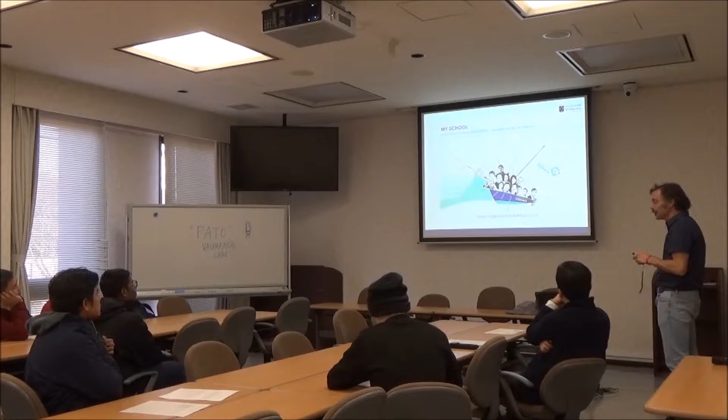I'm from the School of Ocean Engineering at Universidad de Valparaíso - it's a very strange name, but that's the name of the city. I'm basically a civil engineer, but I did some environmental engineering. My major in the PhD was environmental fluid mechanics, and I work with this professor, Professor Patricio, as Professor Lee told you just before. So I'm going to talk about that from that perspective, civil engineering and hydraulics and all that stuff.

Why am I here? Basically because I'm very interested in what happens in Japan. So I took a leave of absence from the university from December till the beginning of March and came to the country of Yoshimi Goda and all these people. We have to deal with coastal engineering problems all the time, and Yoshimi Goda is kind of like, wow. So why not come to Japan and visit you?

Also, I'm really interested in what Dr. Lee does here in terms of tide-tsunami interaction. That was one of the research topics I covered in the last couple of years. Now I'm shifting towards other things - in coastal engineering you do lots of things, it's not so specific.

I'm working with Professor Keiji Satake at the University of Tokyo trying to learn something about inversion of earthquake sources with tsunami data. It's just an excuse to come here and learn something about how research happens here in Japan.

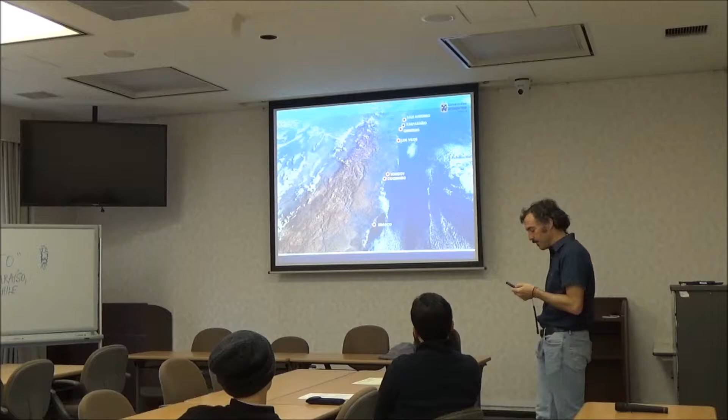And these are the kind of activities we have. We are a mining country - this is the export of iron. We also have salmon - almost all of our salmon is exported to Japan.

Seriously, this is in the south, where the Andes sinks into the ocean. That looks like Mount Fuji. We have lots of our mountain Fuji's there, and this is not a big one - they're much larger.

This is my hometown, one of the second largest ports in Chile. My office is somewhere here, behind this. So imagine that you're studying tsunamis and earthquakes and all that stuff, and you're literally on top of the coast. So it's very interesting.

If we talk about coastal engineering, to give a general point of view, these are some of the variables that we need to take into account when we make a design - for example a port, a coastal road, or an artificial beach. You need to know variables about the ocean, like sea level rise or not, waves, tsunamis, and all that stuff. In this talk, I'm going to talk a little bit about waves and its relation with storm surges, and about tsunamis. I'm going to skip the rest.

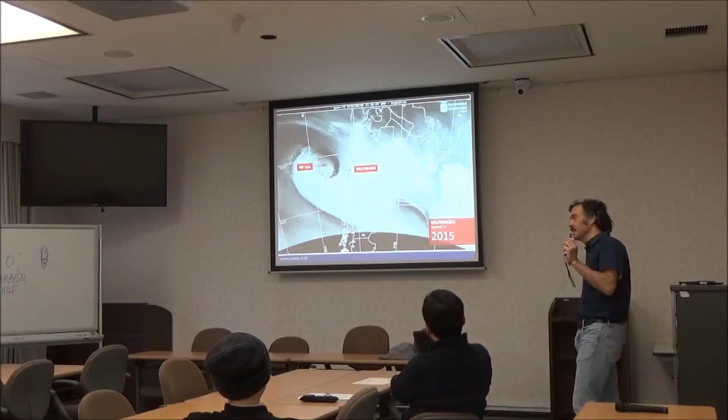I'm going to talk about a big storm. For us it's not big if you compare it with storm surges in, say, the Mexican Gulf. But I'm going to talk about one particular storm that we've been studying because it caused lots of damage in central Chile.

This is the type of image you may have on a coast. There's a hotel, and this hotel was attacked by the waves, and all the facilities on the first, second and third stories were mostly destroyed. And this is just one case.

But this is a very simple thing to explain to kids, what waves are. You need a source of energy, the sun, which generates winds. The winds transfer their energy into locally generated waves called seas, and then they get older. At the beginning they are very difficult to understand, like kids, and then they become more ordered, and finally they literally die and transfer their energy to all the other processes, like sediment transport in the coast.

A very simple thing, but this becomes a little bit more complicated if we start digging into engineering. So waves in the context of storms can be separated into time and space, and there are different scales.

Swell generation and sea generation offshore can take days up to weeks to generate. But then you have coastal waters, the waves approaching the coast, which tend to be affected by refraction, shoaling, and all that stuff. Then you have nearshore waves where diffraction and reflection become important.

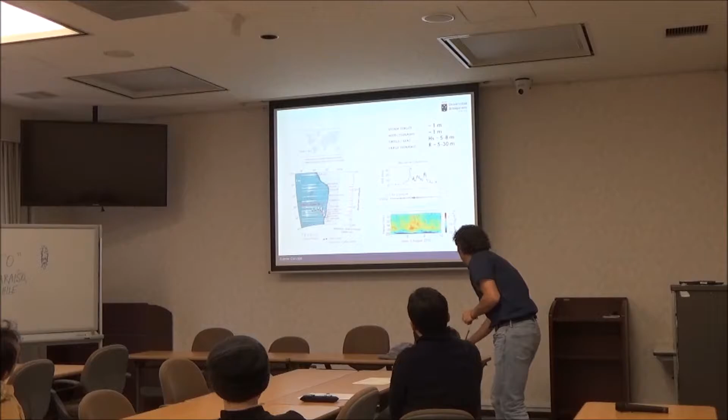You can see here the high frequency long wave being generated by this storm at different tidal gauges in South America. For example, in Callao, which is something like 3,000 kilometers away from the source, this kind of perturbation was detected. So even though it's a locally generated phenomena, it generates waves, tsunamis, and storm surges that radiate from the source and affect other places.

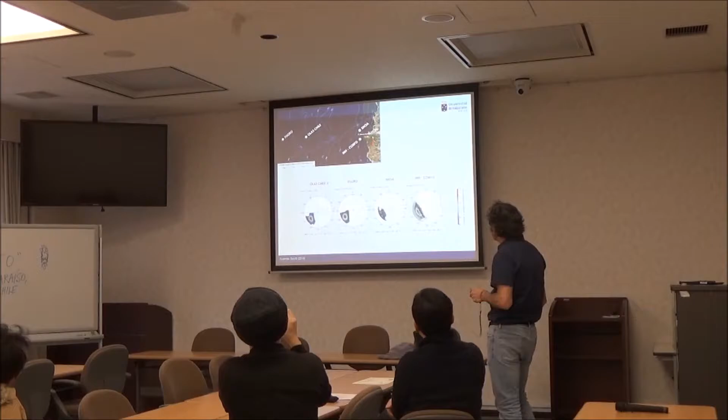Going a little more local, this is Valparaíso, the place where I live. What we can do is get information from wave forecasts, and also get information from buoys, in order to take that information as close as we can to analyze this particular case. Then we can use different grids to take this information into more coastal areas.

We can make analysis within the bay. These are many places within the bay - that's my office there. This is basically the wave height, the period, and the tide level at different times. So we can estimate what's the overtopping, for example, in places like this.

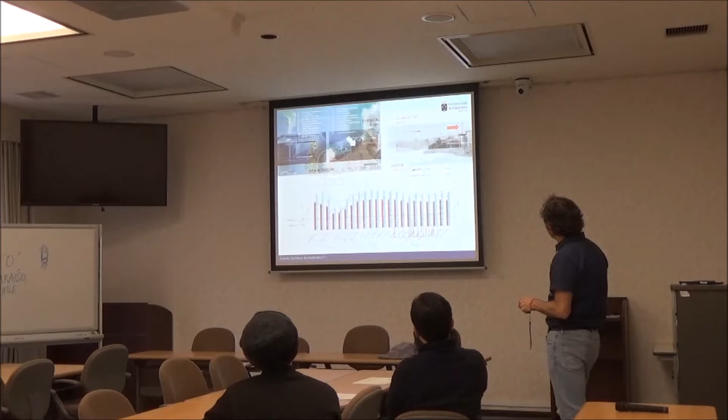This is a physical model that we carried out - the Chilean hydraulic lab carried it out, and we did the corresponding analysis with some sort of OpenFOAM type of model.

So from this type of information, let me show you a video first. It will take some time.

So here's the submarine beach, and then you have the structure here. What we did was build an artificial pond in order to capture all the water and estimate what's the volume. Because with that volume, you can design all the drains of the coastal road, to avoid flooding.

You can calculate, for example, instantaneous flooding or the accumulated volume over time. So in this particular case, we are calculating the flow crossing this area, and with that flow, we can also calculate the velocities and see how safe it is, for example, for a person to be here, depending on the water depth and the speed.

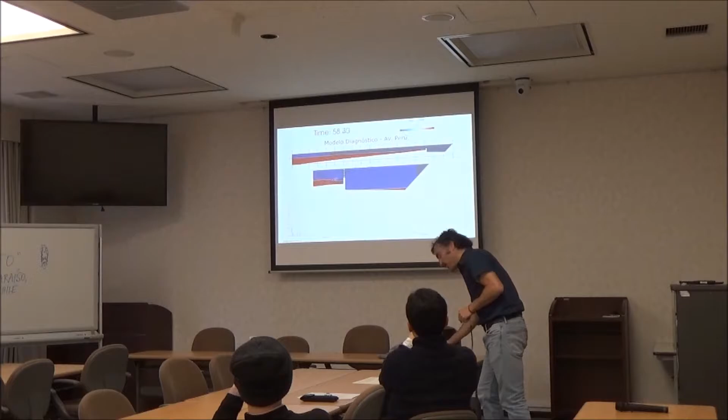Did you use OpenFOAM? It's OlaFOAM - an adaptation of OpenFOAM with some boundary conditions of waves. It was generated by Pablo Higuera from IH Cantabria, and he's now working with Philip Liu in Singapore and in the US. So they adapted the OpenFOAM, and now it's called Ola, which in Spanish means wave. OlaFOAM, yeah.

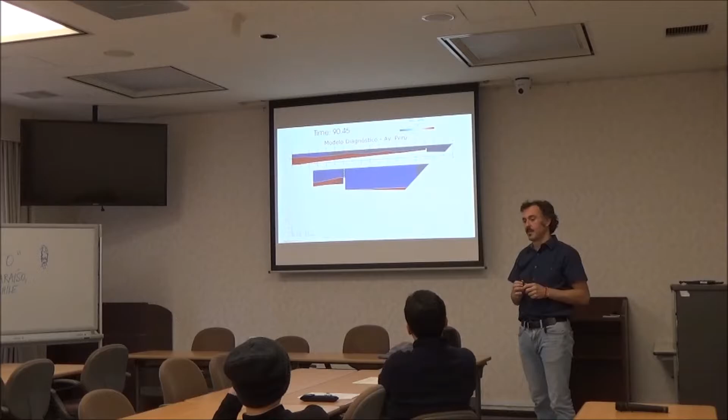So as I said, you can calculate the instantaneous flows at different times, and then the accumulated volume to calculate the drain design. And this one is for safety.

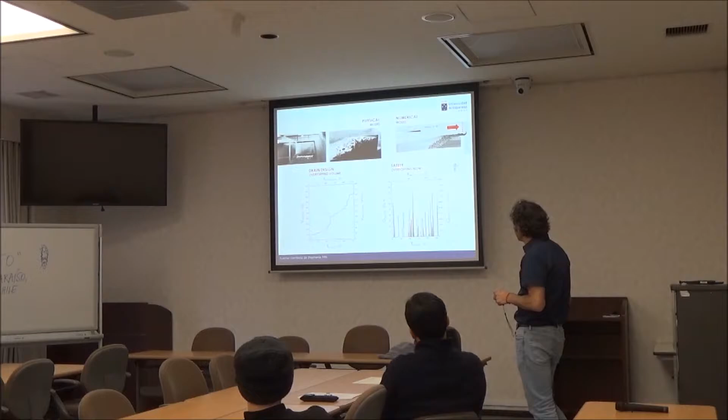This is something very preliminary that I haven't been able to review because it's an undergrad doing a very simple calculation. But you can actually calculate with a very simple body force diagram what's the combination between water depth and speed that would make someone fall.

I brought this because I know Professor Taro Arikawa has done something with tsunamis here, but I haven't found any paper in the literature calculating the flow and the body forces attacking a person or a car - kind of an empirical approach to understand what flow speed would move someone. There are some studies, or even physical modeling studies, going on at Kyoto University. Okay, so I have to go there - I know Professor Arikawa has done something, but I haven't found anything published.

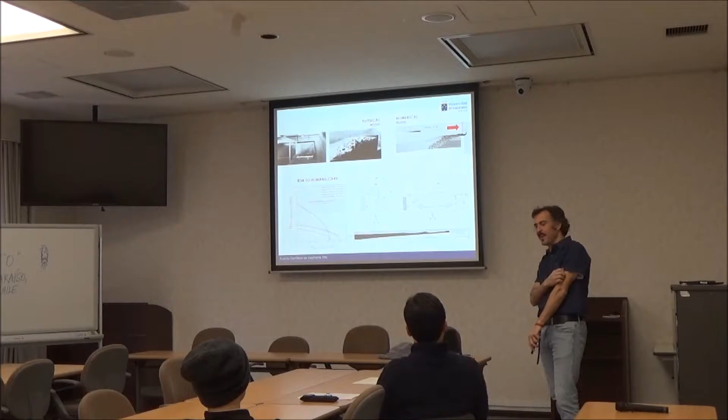Arikawa is in Chuo University. He was at PARI. Yes. But well, so now you give me an idea.

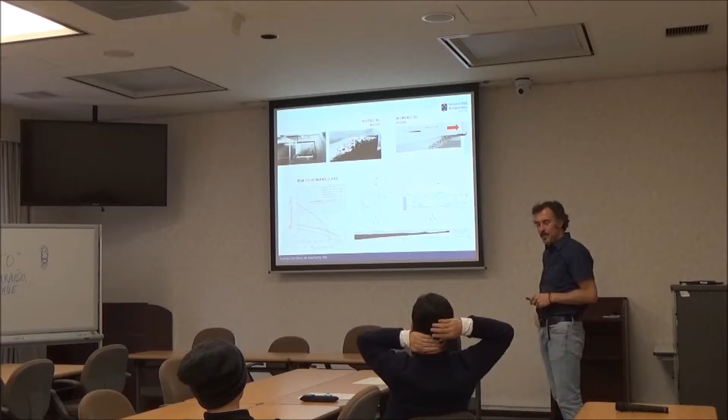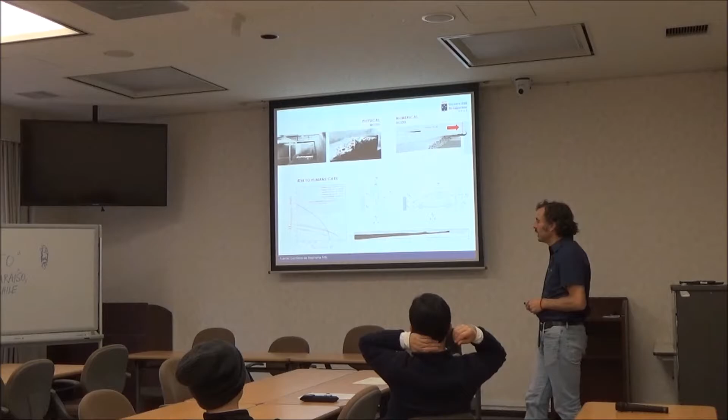Also, some hydraulic engineers in Kyoto University worked on this kind of body forces due to the tsunami and even heavy rainfalls, so flooding situations. Yeah, good, very good.

Also what we have done is, for example, monitoring of beaches to test some models. For example, XBeach, which is a standard, popular model to calculate the evolution of beaches because of wave attack.

And in this particular case, what we did was calibrate the beach. This was the original profile at this place, and this was the final profile. We calibrated the model to tweak some numbers to make it work properly and reproduce the formation of these profiles after the storm.

Currently, we just built this flume in our school. We have no experience in physical models, no experience. So we just jumped into the pool without water. Okay, let's do it.

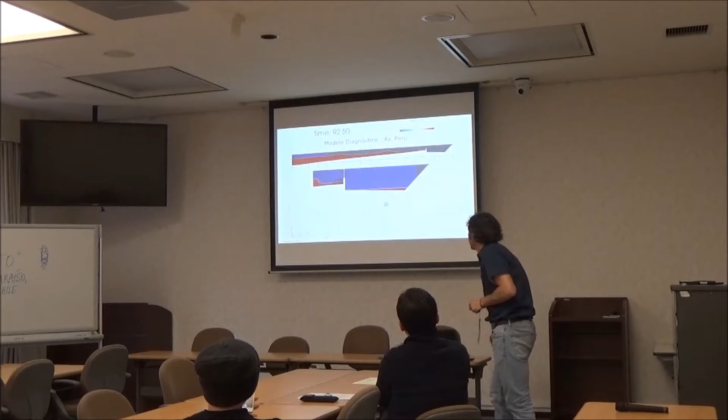So this is the type of thing that we normally see in Chile. These type of piers are becoming popular because in some shelter areas in the world there's little space, so some facilities are beginning to face the open oceans. What we really want to understand is the structural response of this structure.

Okay, so let's see something about climate change. First, a couple of comments. This is again Valparaíso, and this is a breakwater which was built from 1912 during 20 years, ending by 1930 something.

This picture is recent, so that structure has been there for 100 years. This was the way it was built. In those years, Chile was very advanced because it was very connected with the rest of the world. All the ships would come through Cape Horn and stop in Valparaíso, then go to Asia or backward. But after the Panama Canal was built, all the ships started going near the equator, and our country just went like...

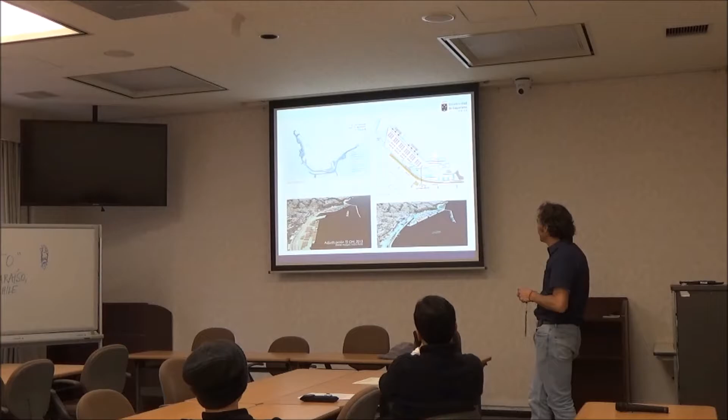Like this is something that's going on now in Chile, in this particular bay. Lots of different designs. This is probably what's going to be built.

So what is being built now? It's going to be probably till the 22nd century. So this is just a schematic on how we deal with statistics. For example, let's say we're sitting today here, 2017, and we're designing something. Probably it's going to be built 2020, 2025. These kind of projects take between 4 and 10 years to finish. And so it's going to be way beyond.

2100. Oh, how do you say that? It's... 22nd century. 22nd century. It's strange.

So then you may have statistical records of, for example, hindcasting wave records, actual records from wave buoys. There are some of them which go back to the beginning of the previous century. So as long as you go way beyond that, uncertainty becomes even more relevant, because the information gathered 100 years ago probably was much worse in terms of quality than what we have nowadays. And if we try to estimate what's going to happen in the future, we also have uncertainty.

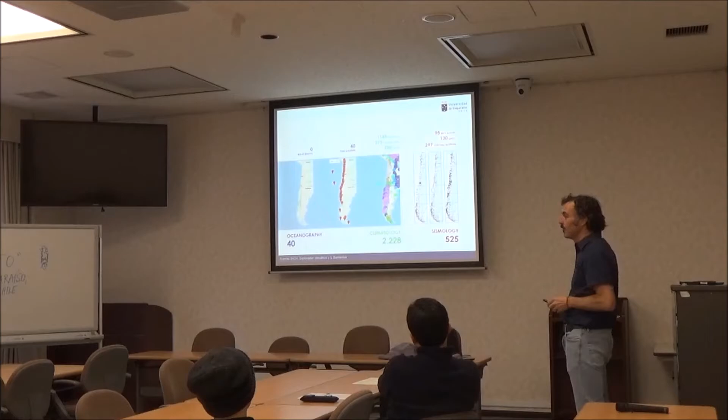And if you want to learn about climate change, you need long-term records. So we have really few long-term records. We don't really know what's going on. So what we actually did was try to change some of these things.

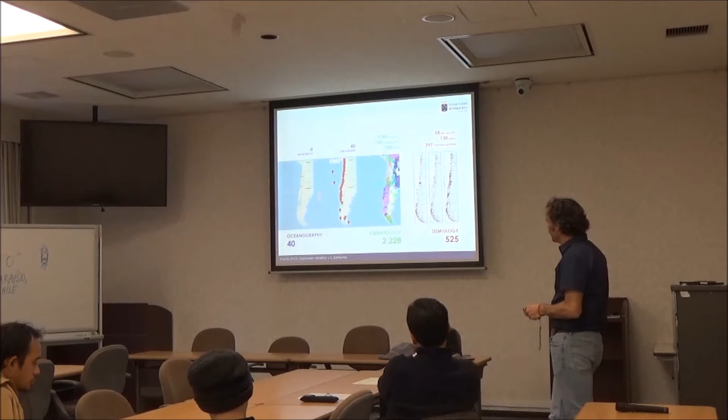For example, in terms of waves, what we did was generate a wave atlas by doing hindcasting, and nowadays we have like 39 years of data where we can actually make a statistical analysis and all that stuff. We finished this last year, and now we're starting to analyze it. I'm going to show some of these results.

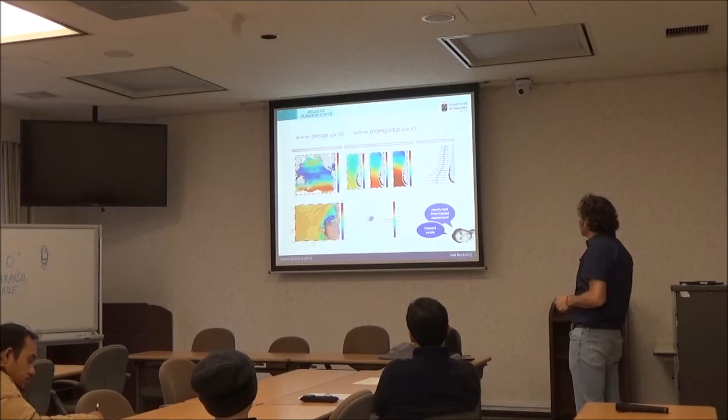So this is just an example of this type of analysis. This is data on the number of extreme events, meaning storms. By extreme events, we mean you have statistics of significant wave height, a statistical parameter characterizing the sea state, and whatever goes 2 standard deviations above the mean is an extreme storm.

The other thing is the maximum wave heights. This is the trend of the maximum wave heights in the same period, and we've seen that they are actually increasing. We're not doing extreme analysis, because then we should pick each individual storm, but it's just showing the trend that there is also an increase in the intensity of the storms. So more storms and more energetic storms.

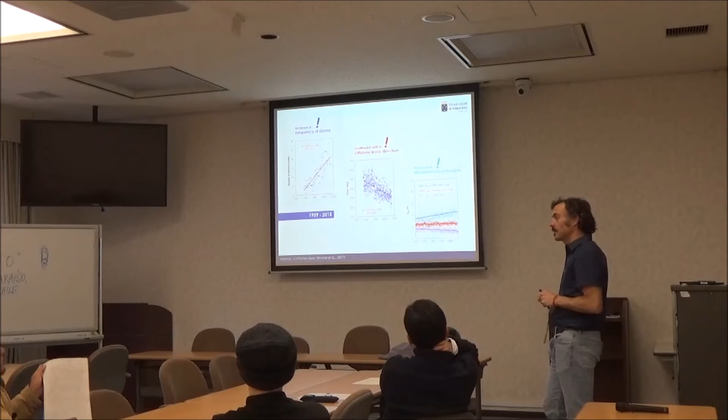And we've seen a shift in the offshore wave direction. Wave direction is changing because the whole climate system is moving in front of our continent. And that means that if you have changes in the wave direction, you're going to eventually have changes, for example shifts and rotations of the beaches, and that kind of stuff.

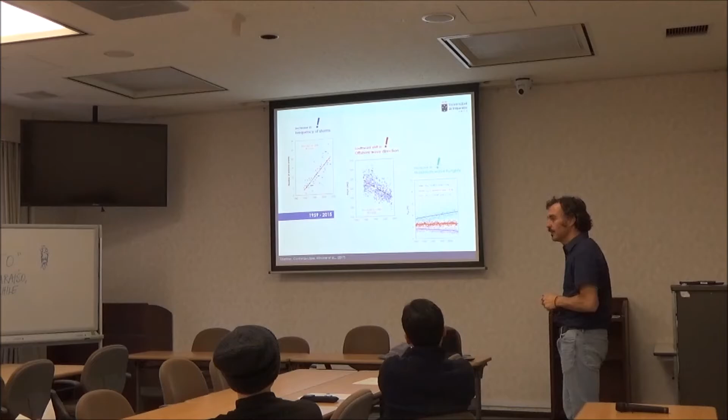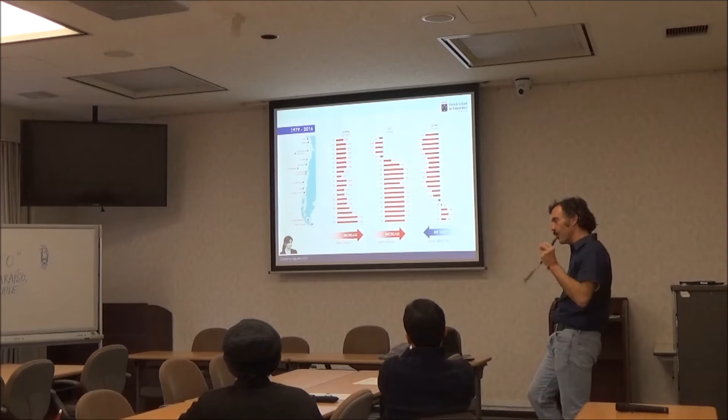So then what we did was extend this analysis to the whole country, since we have this idea all the time saying that we have almost all the wave climates we may find. Well, it's not quite that. And we detected that the change, the slope of the significant wave height, is positive all through the country. So the energy of the waves has been getting larger between this period.

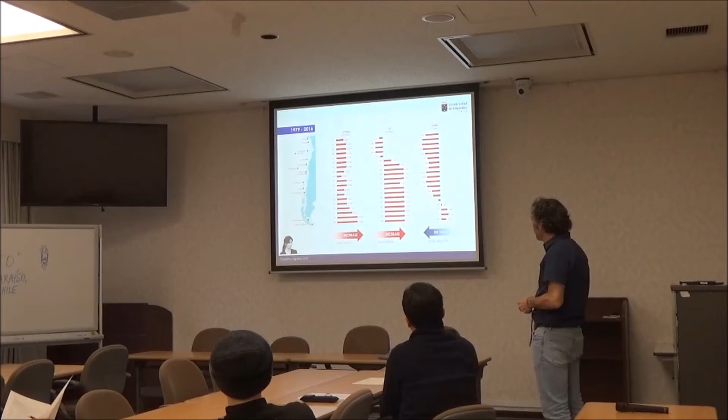And then we have observed the change in direction almost throughout the country. So what I just said before is evidence that it's happening almost in all the country. So basically we have an increasing wave height, an increasing wave period, and a shift in the direction.

So we are trying to move forward to generate hazard maps of flooding because of storms. We already have done this with tsunamis, but the tsunami hazard mapping in Chile is very basic, deterministic, with historical records, no probabilistic analysis whatsoever. And we also have to move into inventory, so basically to evaluate the vulnerability, we need to know what we have in the coast, that's the kind of things.

And go to micro-zonation, defining very locally what are the responses of each individual part of the coast.

Another type of analysis we've done is to evaluate changes in the coastline. For example, at the same bay, we've identified some stable beaches, some that are tilting, probably because of changes in wave direction, and some that are being eroded. We don't really know if this erosion is due to changes in wave conditions or other variables, for example urban expansion. The city has expanded, and the basin that used to be green is now under concrete, which changes all the dynamics. That's the kind of thing we're doing.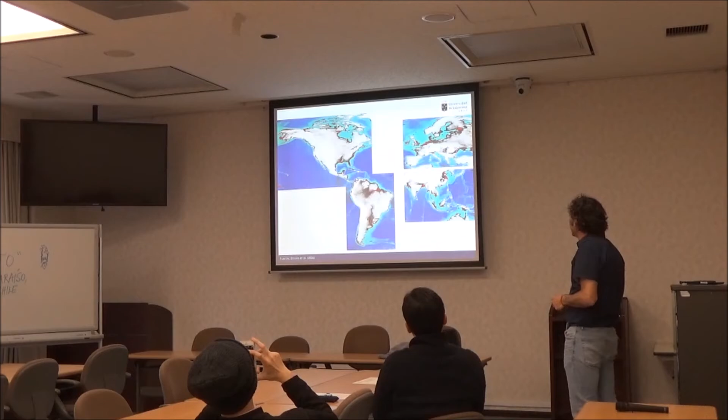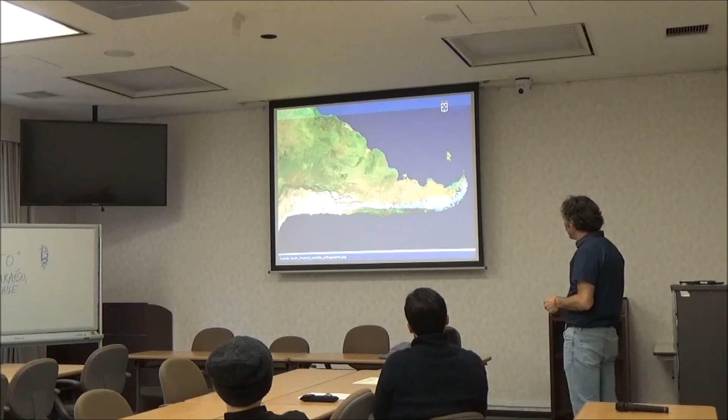You may see that in Chile we almost have no problem because of the constant uplift due to the earthquake cycle. There are some other areas in the world, like Katrina, that area. Some very well-developed countries like the Netherlands will probably be able to cope with climate change in the future, but some areas like Bangladesh, which are very poor countries, it's going to be much harder to deal with. In Chile we have this almost permanent uplift mainly where the Andes sinks into the Pacific. Almost no people live here because it's too cold and difficult to get to, so we probably won't have too much problem in terms of flooding here.

But let's take a look at some of the few sea level records we have, for example one in the north, one in my city, and one in the south. This is the type of behavior we have. For example, in the north there is a decrease in sea level. In places like Valparaíso, it's very hard to make an analysis with this type of signal, but in some of them you may see trends. There's a big change there, probably the offset of the instrument. This is to show that we are not that clear that sea level is rising.

The other thing is these are ENSO years, El Niño years, that generate, for example during Niño years, the sea level increases by 30 centimeters. During an ENSO year it's like you may see what will happen in the future with climate change, a sudden increase in water level. You could, during a year, replicate what will happen in 30 or 50 years. So I think there may be interesting things to study in terms of this type of fluctuation.

I haven't gone through all the geodetic studies being carried out, there are some being done now. But we believe these signals are very affected by the seismic cycle: the co-seismic phase during the earthquake, the interseismic cycle between earthquakes, and the post-seismic cycle, the rebound after the earthquake. All these things may be affecting the position of the tide gauges and therefore the record. We also have the El Niño Southern Oscillation, which is something we haven't done yet and it's interesting.

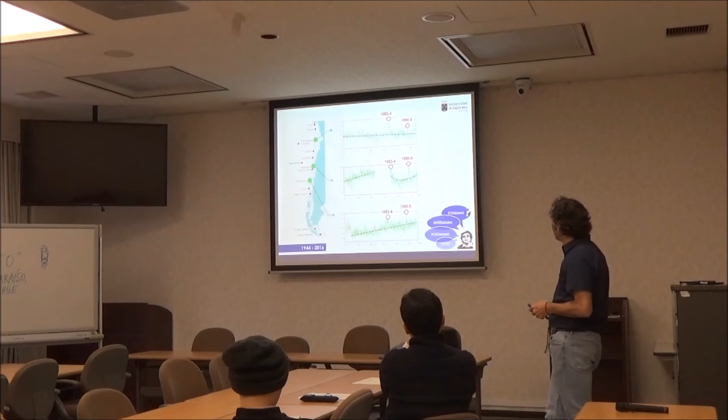For example, these are the slopes of the sea level signal, red means increase, blue means decrease. Here we see that the mean sea level rise attributed to worldwide average situations is far from what's going on in the country. Almost all the stations are having decreasing sea level, and even have big changes between neighboring stations. This is just looking at the statistics, nothing else, just data.

I also do this kind of analysis around Japan, especially Western Japan. We have similar results that may be affected by seismic motions. So it's quite difficult to say whether sea level is rising or falling because of the seismic motions, so many noises polluted by seismic noise. You also have cases where two neighboring stations differ, I can show you later.

Wow, this is good. I've been working on this for a couple of years. And you don't have anyone to talk with, and then you have these people talking about these things.

For example, this is the uplift of 3 meters generated by the 2010 earthquake, magnitude 8.8. That 3 meters is huge according to average values worldwide - it's like 1,000 years of climate change, but you get it in a couple of minutes. So the earthquake signal is super important. You may see, for example, fishing ports that are not useful anymore because of this effect.

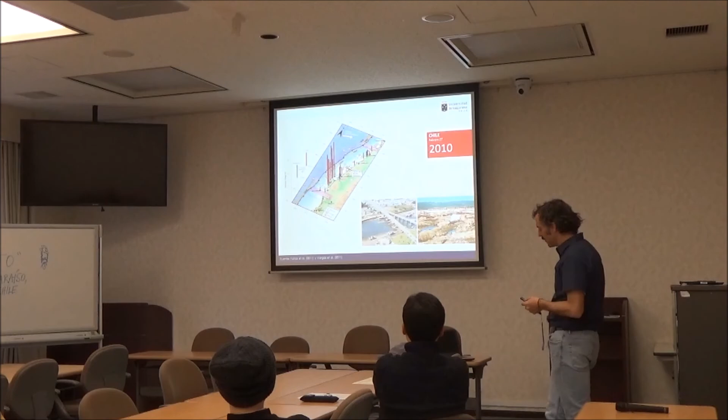Japan is, I guess, the third economy worldwide, and Chile is like the 40th or somewhere around there. So Japan is much more developed, and you can see that in research. For example, having 15 people working on a very specific issue is very difficult to find in Chile. So we have a lot of things to learn from Japan.

After 2010, there was an agreement between the Japanese government and the Chilean government. It was a 5-year project in which Japanese researchers went to Chile and Chileans came to Japan. So we've learned a lot about tsunamis and earthquakes from you.

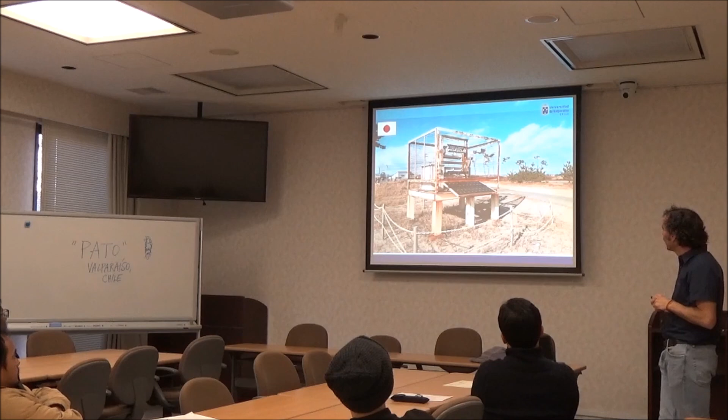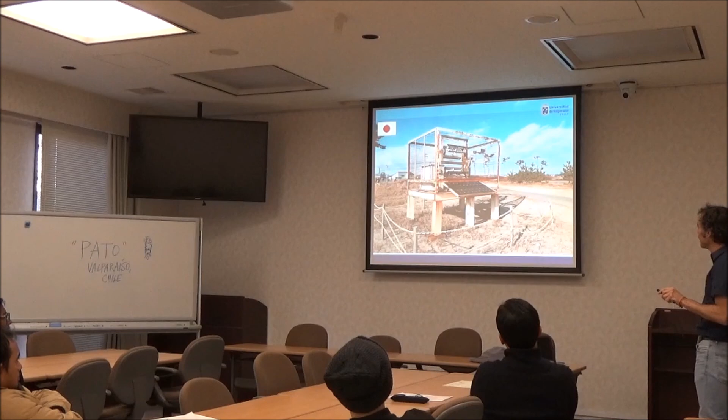I think this is a flow rate measurement device, I don't know how you call it. This is a device that rotates with the flow - well, it should rotate with the flow, so the wind doesn't rotate it - measuring something like anemometers or something like that. It's located in a base, which I guessed is so that when future tsunamis come, at least with the rotation of this, you're going to be able to calculate the speed. Someday I found it and thought, wow, this is so simple - why didn't we think of this before?